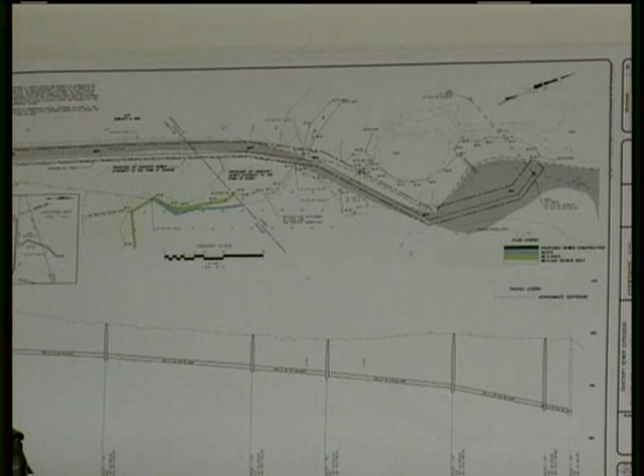Good evening, my name's Robert Wheway. I'm a professional engineer and principal with the firm of Codespoti & Associates. As Mr. Porto pointed out, we have an application before this commission tonight for the extension of an existing sanitary sewer line to service the Sunrise Hill properties located adjacent to Route 34.

The application before the commission tonight deals with the Hine property. All told, there's approximately 800 lineal feet of sewer line construction proposed across that site and Route 34. Out of that 800 lineal feet, approximately 110 feet are located within your 100-foot review area.

If you take a look at the smaller color copies we just passed out, that should give you a better idea of the activity area with respect to where the sewer line is proposed. What we try to do in that area is put the sewer line installation in a location that will result in the minimal amount of disruption.

For the most part, if you look at those plans, the sewer line is either going underneath existing bituminous/gravel driveways or in very close proximity, paralleling the edge of it. That'll facilitate installation of the sewer line while maintaining existing vehicle traffic that goes through the back area servicing the parking and storage area in the city of Derby.

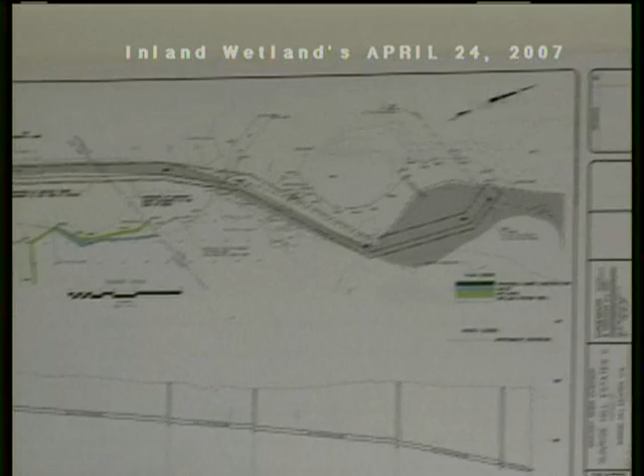I think it's a pretty simple and straightforward application in our opinion, and with the way we have the sewer line laid out, it'll result in a minimal amount of disturbance within the 100-foot review area. So with that, if the commission has any questions, we'll try to answer them.

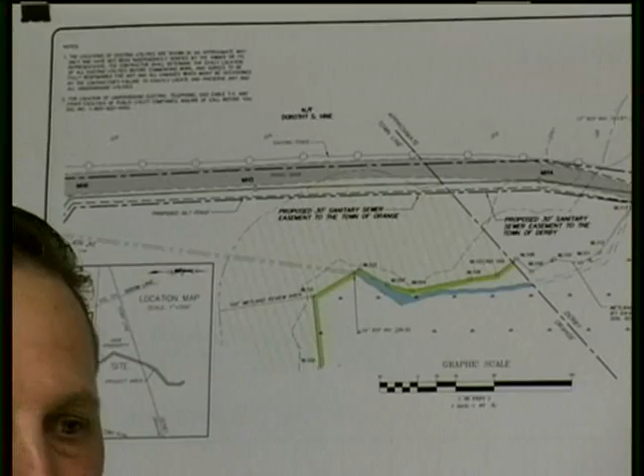Bob, the pipe you're going to be using, is it going to be Schedule 35, or what? No, it should be Schedule 40. It's 8-inch PVC.

Is it tested, pressurized? Oh yeah, as part of the process, because this is going through right now. Just so you understand, it's going through both WPCA's, both for the town of Orange and for the city of Derby. It's already basically gotten approval and sign off from both commissions.

McCafferty, I believe, is also doing review work on the plans on behalf of the town of Orange. But my understanding is that when the sewer lines go in, they'll have the normal testing done, which will consist of pressurized air testing after they're installed, just to ensure water tightness on the pipe.

Bob, why is this coming in now without a full site plan for what's going to be, for the reason why this is brought in?

Well, in the context of where we are, what we needed to do is basically start at ground zero and get through WPCA, because if an agreement couldn't be reached with regards to the sanitary sewers, basically there is no project.

So we're taking it one step at a time. Getting the WPCA approval was step number one. The next step, where we're at right now, is what I'd consider step two: getting approval from the local agencies, both the town of Orange and the city of Derby, to allow us to extend or install what I'll refer to as the off-site cross-country sanitary sewers through the Hine property.

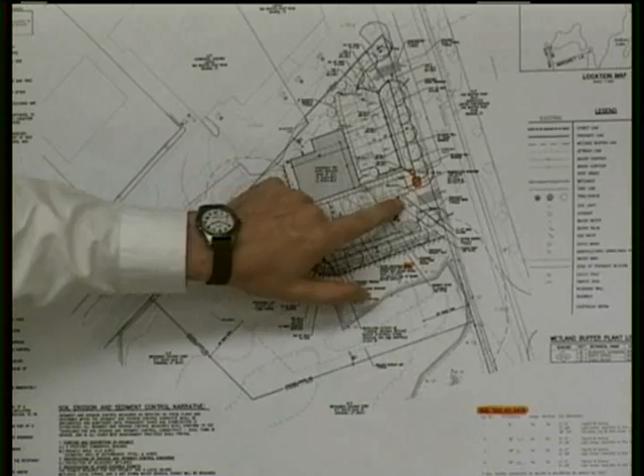Second, a detail of the retaining wall was put on the plans - a modular block wall, standard detail. In addition, the commission requested that we show the outfall or under drain system and tie that into the sediment chambers. They also asked us to investigate the opportunity of moving the sediment chamber out of the pavement area so we wouldn't have settlement issues with adjusting the frames, so that slid over into the grass area.

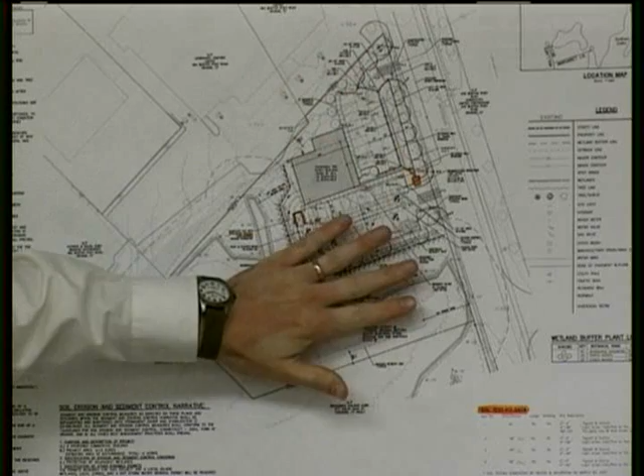In addition, we conducted test pits on March 30th - 4 test pits in the area of the underground retention. As you recall, while this application was submitted under your previous regulations, we designed this in accordance with your new regulations, which says the commission may require it. The underground infiltration area is designed to retain any increases in flow all the way up to the 100-year storm, which I believe was one of the comments Schumacher indicated. So we calculated the runoff for the site under existing conditions, calculated the runoff under proposed conditions, and stored on site that change in runoff all the way up to the 100-year storm.

In addition, we did test pits in the 4 corners of it. We found about 4 inches of topsoil, and then down to about 4 feet, light brown medium fines, sand and stone - material well suited for infiltration. The elevation of the groundwater, trying to read the topo, is about elevation 40 in this area, so somewhere around 39.5 to 40.

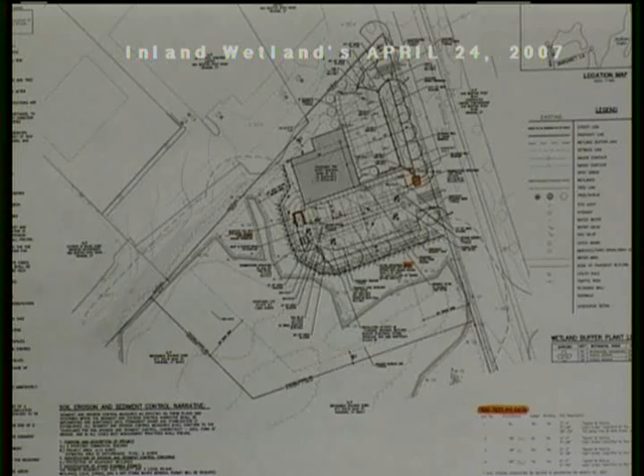We also revised the plan, going to a shallower infiltration gallery system. Before we had something in the range of 30 to 36-inch galleys; we're now at 28-inch galleys, providing a 1-foot vertical separation between the bottom of the gallery system and the groundwater. Obviously in March we probably hit one of the peaks of groundwater. Those revisions have been submitted, the test pit data is on the plans, and it's my recollection those were the comments made by this commission.

So at this point, Eric is here to present his findings in terms of the wetland issues. Thank you.

Good evening. My name is Eric Davis, and I'm a soil scientist and wildlife biologist with Environmental Planning Services. Our offices are in West Hartford. Michael Klein was supposed to be here tonight, but he had a family emergency, so I'm filling in for him. The only reason I mention that is because the report is fairly new to me. I have been to the site and I'm familiar with it, but you'll have to bear with me if you see me staring at the report and reading from it to go through the site features.

I'm pretty sure some or all of you are familiar with the site, but I'll briefly go through the wetland characteristics as I saw them. I was on the property last week - do you want to put that up there? Also several years ago I spent a week or two doing wildlife surveys on the lower parcel. Oh, excellent, thank you - really helpful for you.

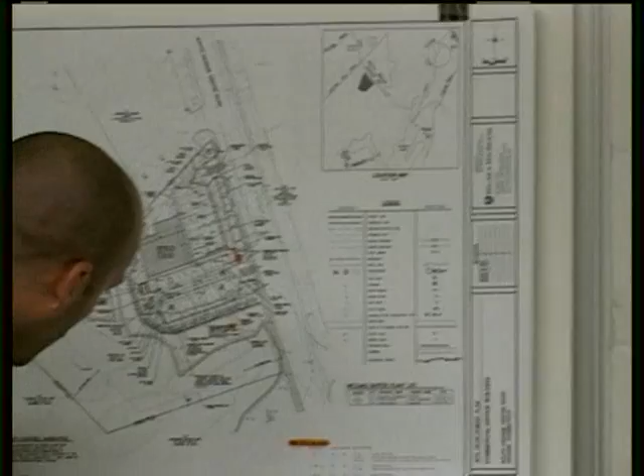Can you show where the berm is on that? It's hidden by trees, but it runs about as my finger's running there. On your plans, it starts at about wetland flag 132 and runs west. It's an old berm, and you can tell by the trees growing in it. So when I said there's historic disturbance, it looks like there was some old excavating and filling all around the wetlands, in the wetlands, to create that berm.

Obviously associated with this development, there's been some filling right against the wetlands here. There's a ditch that was created, and all sorts of fill piles and disturbance in this area. So essentially what you see is a disturbed wetland and wetland-upland interface, with the center of the wetland area relatively undisturbed — still native vegetation, undisturbed soils, and a more natural condition.

If you look at photo 4, that'll show you the northern boundary of the wetland. Photo 4 is right here, looking at that fill slope adjacent to this development.

If you look at the photos, photo 1 shows the area that's proposed for development. You can see that odd hill on the right-hand side, which looks to me, from what I saw in the field, like an old fill pile. So the upland portions of the site have also been disturbed, though it's historic disturbance.

Photo 2 shows where that stormwater outfall has deposited sediment and created some scouring. You can see some garbage and debris that's been deposited, and loose sediment on top of the wetland, a sediment delta formed at the end of the outfall. This is all occurring north of the berm, which divides that disturbed area from the undisturbed portion.

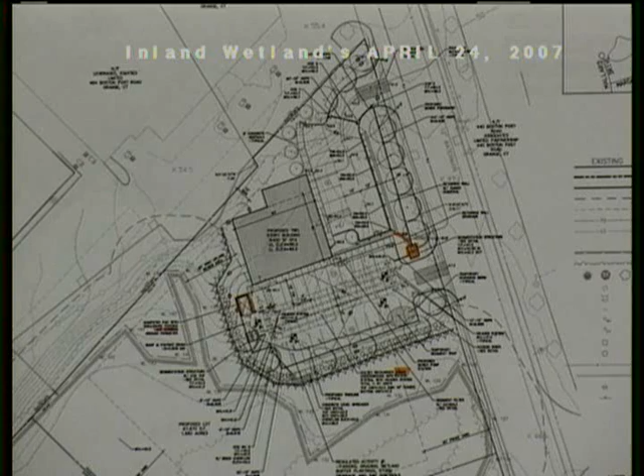No, I didn't see the wrack outside of the wetland, and I didn't see any ponding outside of it. I'm not sure if we flagged the wetlands or if someone else did. I didn't review the wetland line myself, but there were no areas where I walked out and saw evidence of water or ponding beyond the wetland flag. The wrack and the ponded water was contained within the flagged area.

You probably know why I was asking that, because it might be a floodplain up in here, according to the contours, right in here. Well, it's interesting you say that, because that area exactly where you just pointed, flags 132 up to 135, that angle area, is what you see in photo 2.

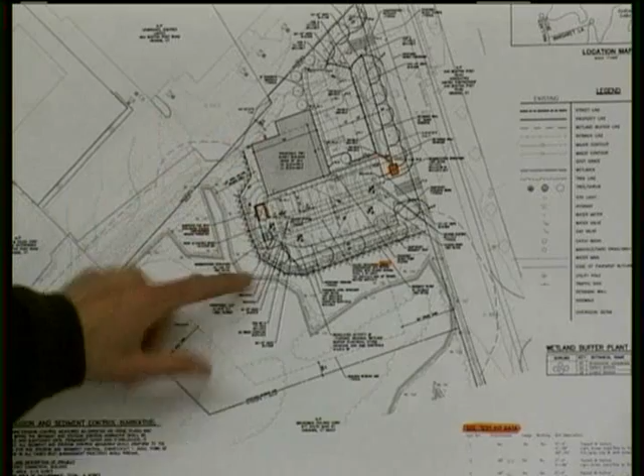I wouldn't call it a floodplain, but that's where that sediment delta forms. This outfall comes down, you have high velocities here, but as the velocities decrease, it spreads out. There's a sediment delta that forms here—that's where the velocities decrease, and all that sediment, that garbage, is sort of just sitting right there. It does form into that area, and it flows this way and that way.

Any other questions?

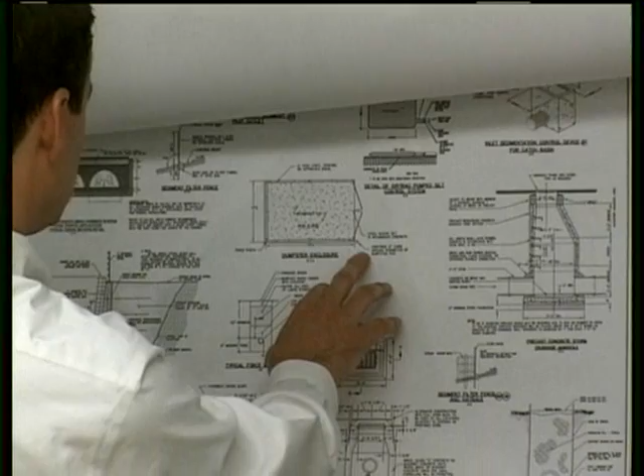I had a question relating to the first gentleman's presentation. For the dumpster area, we'd like to see curbing, which you provided. Is that out of asphalt or concrete? It's basically embedded in the overall parking, and there's a fence on top of it so it can't get knocked out. But the plow won't have an ability—I'm assuming the dumpster truck pushing against it could defeat the purpose of our request.

Yeah, I think we would have no objection to that, we talked about it. There's plus and minuses, I remember saying asphalt, and that might have been my oversight. I'd be more than happy to revise the plan to go concrete so they could drill the fence into it. We could do that curbing. Right, we would have no objection to that—something for the dumpster to be pushed against, for some strength.

No problem with that. Also, I was looking at your soils—48 inches for your footing depth, light brown, medium, with topsoil. Are you going to have somebody test the soil to get the bearing capacity, 2,000 or 3,000 psf? I'm sure whatever the building official requires. I'm not a geotechnical engineer, but I assume we'd have one design the borings, and the building official would require those calculations. I'd just make sure you do have something, even if they don't require it, because it could sink. Nobody wants that.

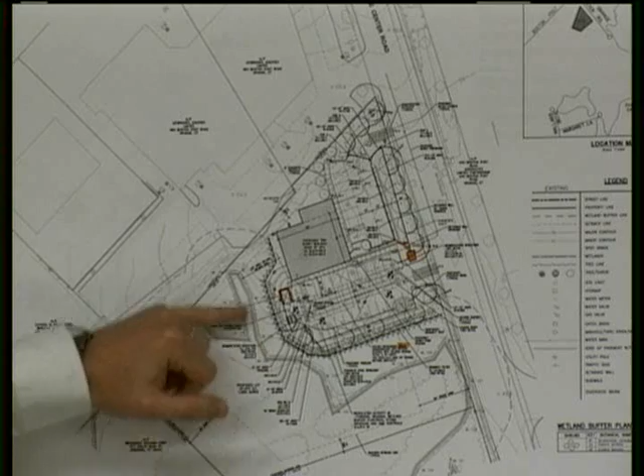Eric's comments tonight, in terms of observations—all the same things I've seen. This is a large diameter pipe, in the range of 36 inches, carrying a huge amount of flow. If the commission so desires, there could be an opportunity to provide riprap check dams and appropriate scour protection. It would need big riprap and would require activity in the wetland itself, but if the commission believes there are opportunities for enhancement through sediment containment in these areas, we would be willing to work with the commission on those improvements, even though it's really all coming right off of Route 1.

While we are in there, there may be some opportunities to do that. At this point I did not see any riprap protection, or if there was, it's long been filled by sediment. Not formally, no, so there may be opportunities there. If that were done, would it be something that could be cleaned out periodically to catch sediment? Because this is eventually going to keep filling with sand from the road—it's road sand and a lot of foam cups coming off Route 1.

I think the goal right now is, with the berm, you probably get about 2 inches over a very large area, which is very difficult to clean up. If we created a scour hole or depression, I'd rather clean 1 foot out of a small area than 1 inch over a large area. Ultimately who's responsible—probably the DOT. We could work with the DOT on that. The grade is relatively flat, so it could be maintained on a regular basis, as opposed to now, where it probably never gets maintained at all.

But yes, it would be accessible from the tail end of this parking lot. The grade is relatively flat into that area. We'd obviously work with Eric and Michael to try to find out where the best containment area is here. But right now, probably if it overtops the berm, the sediment just keeps going. There's no containment whatsoever. The berm probably serves its purpose to some extent, but I think we could improve upon that.

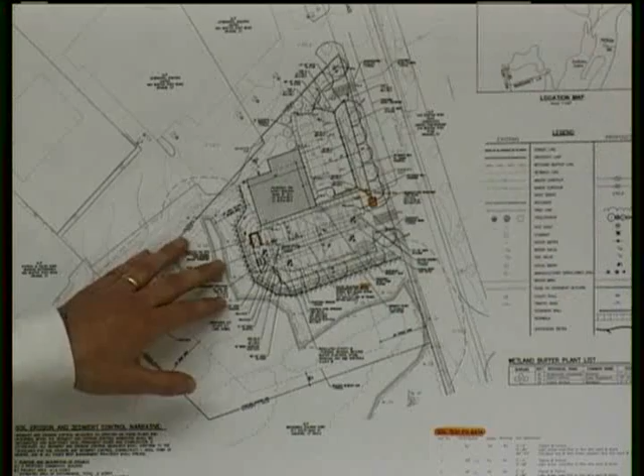We should also be able to slow the velocity down with stone here. I saw some velocity that's really even picking up some of the natural soils and eroding them down through that area. But at least we can take the punch out of this velocity and let it migrate its way through the wetlands naturally, as opposed to the velocity that's occurring now, basically putting all that debris up in that area.

So we can take a look at that in the field, and it appears we're going to be continued anyway. Maybe Scott, you and I can make a field visit out there together and come up with a scenario, a deal that works well. I think that would be a good idea.

One of the things I've noticed myself is that because of the grades, you folks are doing a much better job with the split level parking area compared to the properties north of you, but they've got substantial grade change to get out of these properties from the back of them out to Route 1. So there's a tremendous amount of sanding done, and I see you even have, one, two, three, four, five, six, it's like ten catch basins depicted on your plan.

And I can tell you that a lot of those are not really catch basins so much as they are holes punched out of the pipe to get rid of the ponded water that was back there. So there's a substantial amount of sand, and what's actually running into my mind is that if there's some way that...

Between Ravenswood, Mr. Fisk, Brunswick Holdings—there we go, making sure I have the right applicant here—that possibly work out something with the owners above you that they might want to share in the cost of some type of sediment trap just prior to the discharge of that pipe. Then the onus goes back on the people that are creating the problem.

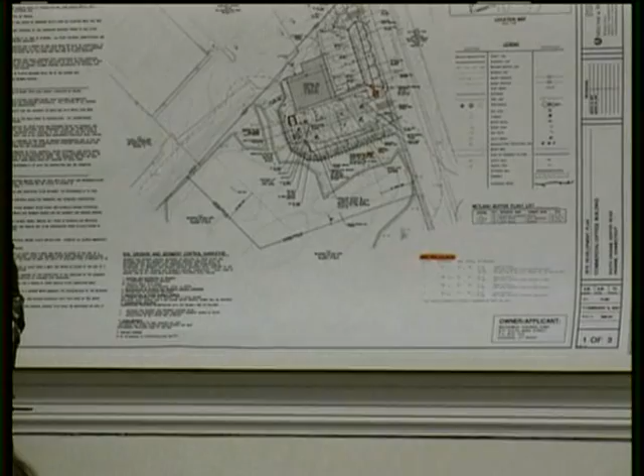Any other questions? Would you just double check, and maybe you already know this - is there any storm where the water is going to be backing up into this area, 133 to 135, or is that something way above the 100-year storm? Currently the floodplain goes around this portion of the pond, but it doesn't come up into this area. These two are interconnected by a man-made ditch, cut between here and the cell storage. So my investigation is that the ponding or flooding back through here doesn't really occur. This is really water kind of segregated to that. It's been my experience, and if you recall, you've been out there, the topography jumps up pretty quick - this is all old fill piles, so this topo here is at elevation 40, but it immediately jumps up to 42.

We will take a closer look at it. I'm sure after last week's rain, if there's any evidence of leaf being pushed outside on that, we'll be able to know that. These wetlands were flagged quite some time ago by Soil Science and Environmental Services, but I'm sure after last week's rain, we'll know if that area received any flooding.

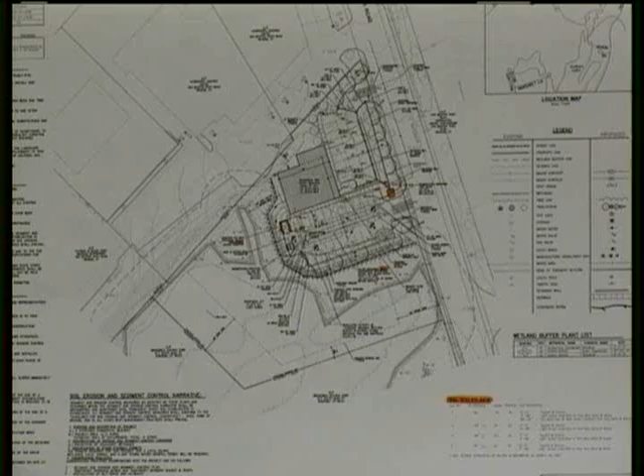But the flood number was 39.5 or 39, right? On the lake, it was 39 and somewhere in the range of 39 and a half. Right, so you're looking at elevation 40 here. Right, however, this is a flashy area, so a lot of the stormwater coming off the roads could raise up pretty high there. Yeah, before it maybe...

...gets over the berm. I guess the difference is there's clearly localized flooding in this - it's the wetland, and this pipe really gets going on it. But ultimately it's not flooding like a backwater condition coming up through there. I think the area actually serves quite well to really take the flashiness out of it, so by the time it gets down to the more sensitive lake association, the flashiness is taken out of it because the berm mitigates through it, migrates, and then goes to the ditch. So as much as we may say the area has been degraded and it's a sediment trap - for all intents and purposes it is acting as a sediment trap - the lake is really serving as the greatest beneficiary of this wetland and the way it's functioning. But it clearly gets some localized flooding, but I don't believe it stays, it probably goes away pretty quickly.

But we'll take a look at that too. I was out there after that heavy rain, and that area you're talking about, I didn't see any evidence that it flooded beyond the flag line. The flag's still out there? Not all of them, but most of them. As I said, it was flagged quite some time ago, so I'd be hard pressed to think that all the flags are there.

Any additional questions? I have one - not related. I noticed the wetland buffer plant list showing some shrubs that are native and would be great to put in, as you note. What have you decided for trees? Are there certain trees you'd be planting? My concern would be keeping the plant material non-invasive to the wetland area. One tree I would suggest not using would be Norway maple, Acer platanoides. Maybe Acer rubrum, the red swamp maple, might be a better choice if there were a choice to make.

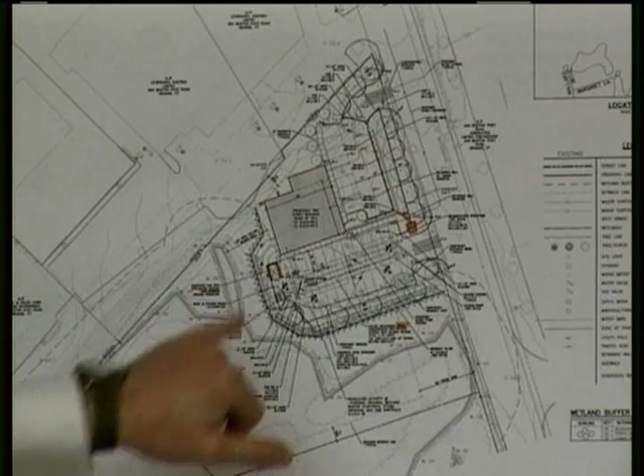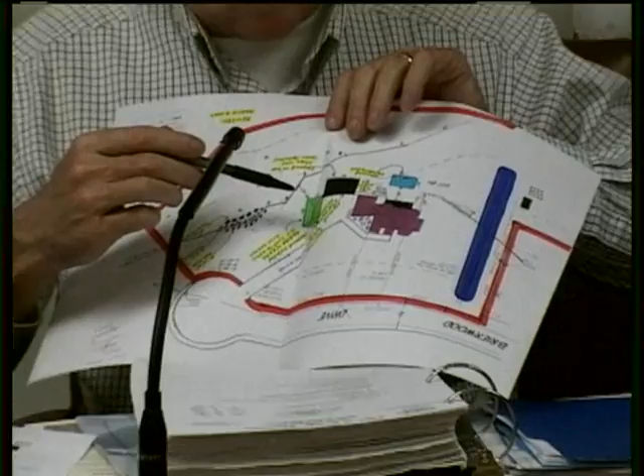So I guess the question is, how do you want it to read? Four-bay garage, we don't care how many doors he has? Because right now, existing, we say four bay because if he only puts two doors there, they could be two 16-foot garage doors. It's the same thing. It's his choice if he wants to put four garage doors or two, but nothing else has changed.

The wording, and the applicant actually - I first looked at it and remembered hearing about all that, but we decided we'd better not do anything further. So you want to just put four-bay garage? I think it's my opinion that a motion should be made to modify this to be what it actually is. It's going to be a four-bay garage regardless of how many doors there are. Okay.

I'll move to modify that to make it correct with the 4 bays. We have a motion. Anyone second? Drew seconds. Everyone in favor? Motion carries. Thank you.

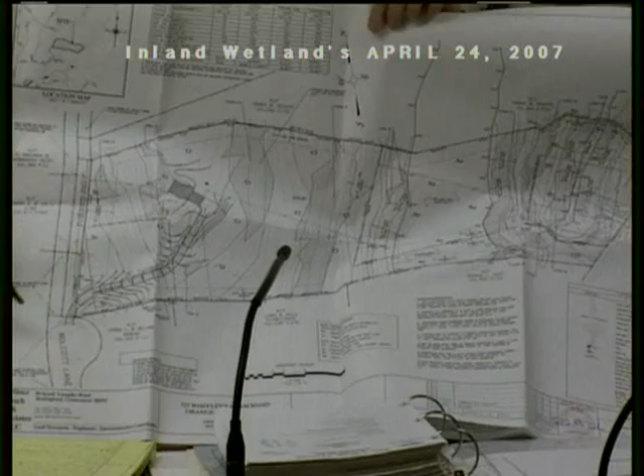Wheeler Farms Road is out here. The end of Wolcott Lane is over here. There was a proposal for a house here, with a driveway coming down. There's 100 feet of road frontage here on Wolcott and 50 feet of road frontage out on Wheeler's Farm. So they got their 100 feet.

Wetlands are confined to the back portion of Wheeler's Farms Road. No wetlands on this side at all, there's the property line here. However, there was a lot of concern originally in why this didn't come before the commission last time for any type of action, because we're trying to come up with a way not to flood the downstream property owner with the size of this driveway.

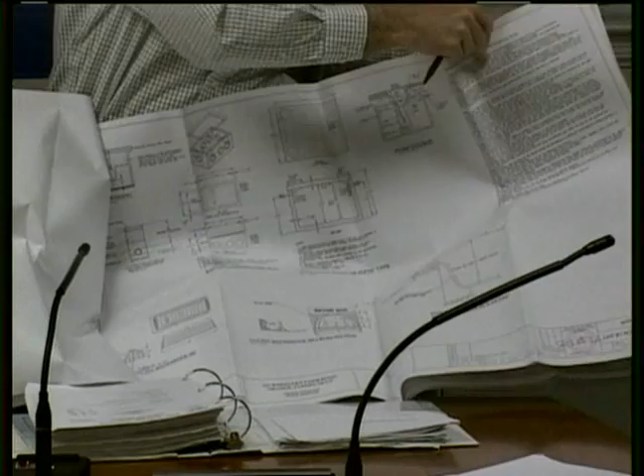So what's being done is there's infiltrators that swale down into a yard drain, and the driveway itself is going to act as a berm to take care of any water flow. It comes down through a very deep seep envelope underneath the driveway, which allows water to percolate down through, straight down, or weep out slowly to a natural depressed low spot right here.

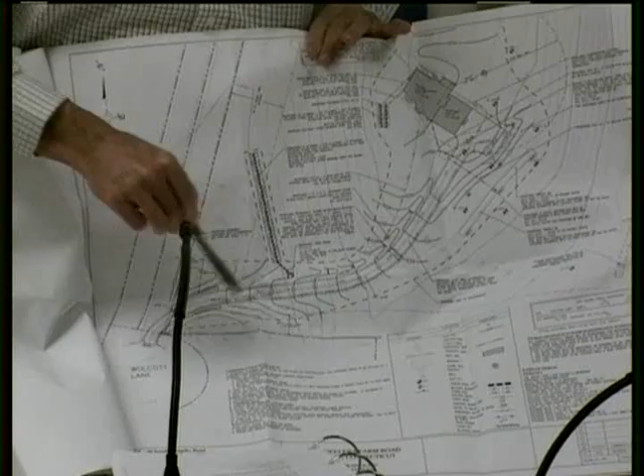The town engineers asked that they also swale this side and bring it down into this bowl over here, and eventually it will probably fill at some point and drain out into the curb line of Wolcott Lane, down into the drainage system there.

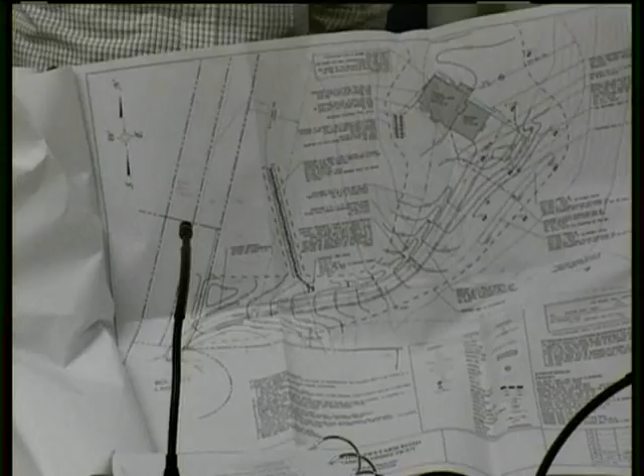Tell me what you would like to do with it, please. Did you say there's no wetlands here? Are there any wetlands going to be impacted? No. So do we have jurisdiction?

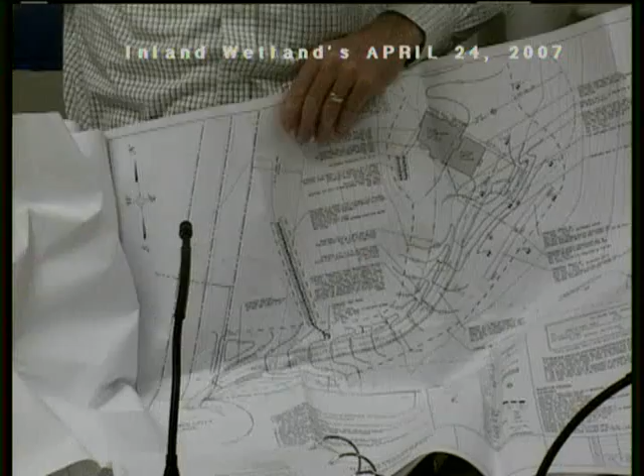We have jurisdiction over some drainage that is going to go down eventually to the Turkey Hill Brook, quite some distance away from the road. Where's the drainage going to Turkey Hill? It's going to go down Wolcott Lane, past Winnie Hill, heading towards Herbert Street.

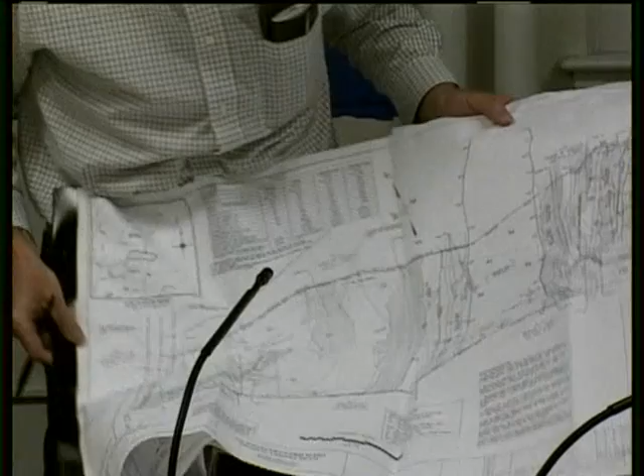And Turkey Hill Brook runs kind of down through this ill-defined area, and meets up with it on Wolcott Lane as it comes down and around. But it's, I mean, several hundred feet.

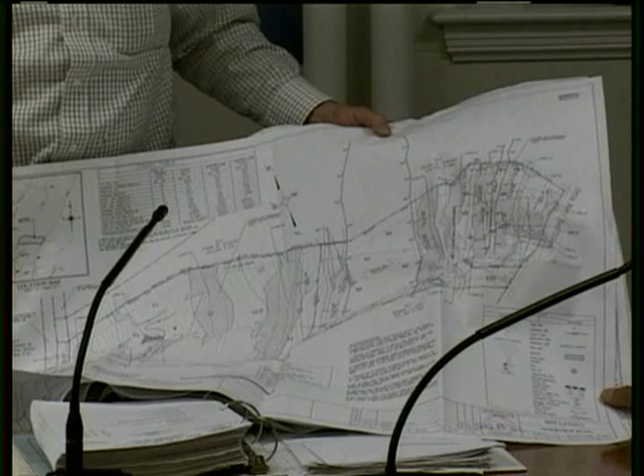So really what we would be looking at as far as our jurisdiction is additional water into the road — there is already a severe icing condition up on Wolcott Lane on the opposite side of the road due to ledge that keeps bleeding out, and the town is contemplating putting a basin in to intercept that ledge runoff and put it into the drainage system, which also gets down to Turkey Hill Brook again.

Okay, so we really want to have it on site. For the most part, it looks like the majority of that is going to be the case with the way they've designed this system.

Now, I know the gentleman who is the adjoining property owner is very much the watchdog on this site, so that's taken time. I think they started this project in 1999 — it's been a long time coming to get going.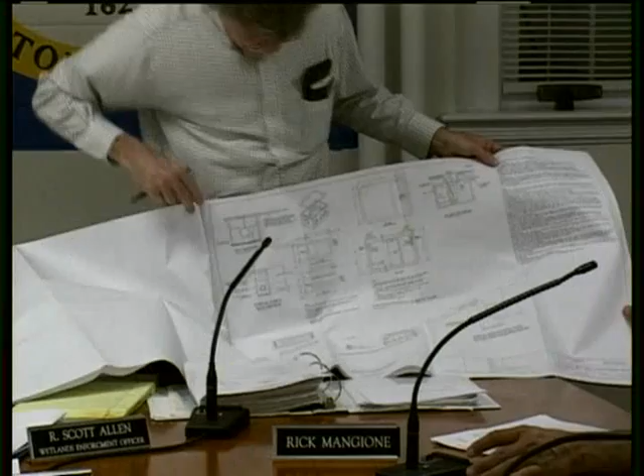If anything, it's going to help the situation out because the driveway's going to block the water, correct? Yeah, it's supposed to act as a berm. There's also roof infiltrator in this area.

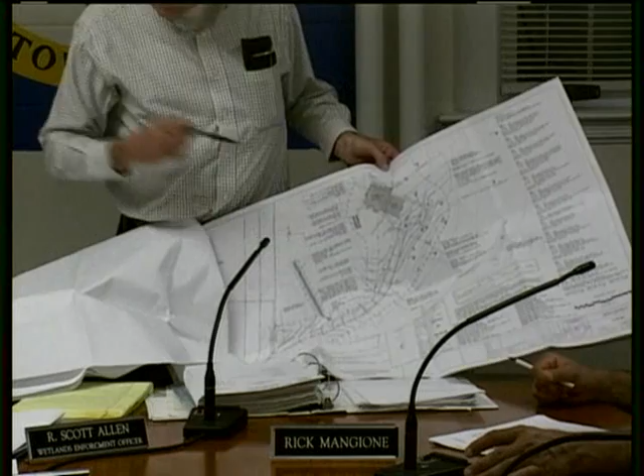Yeah, I don't see any problem with it. I mean, it's going to help out the situation.

I wasn't going to require even an administrative application because there's, I mean — but you can tell me otherwise. Anything else?

No, just again, thank everyone in the town of Orange for not beating us up too badly with all the rain that we had. It was a tough one for a lot of people. I think everybody got a little bit of rain.

Well, just living on the lake and stuff, they actually closed Mallard Drive. It was just something we keep saying is going to be an issue, and the police closed it for pretty much most of that night. It became a safety issue because then we couldn't have people get out because of the flooding.

Mapledale's closed, a portion of Westbrook Road was closed, and I think that was about it for closures in this town, which really is pretty amazing considering the amount of rivers we have compared to what a lot of other communities suffered. And we didn't get the tornadoes that South Carolina got.

So all in all, the horrendous flooding that occurred down in the Greenbrier area — there was 30 inches of water in those people's basements. You couldn't even see the snow blower at the end of a driveway, all you could see was the guides.